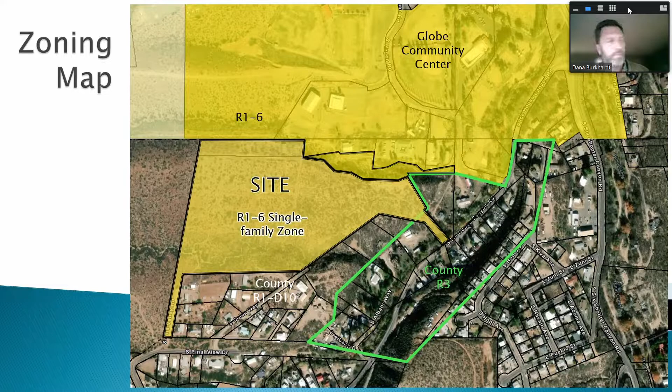Or the applicant has the opportunity to dedicate that land to the county to become a public right of way, or something like that. So there's options, but this is the process that we go through to make sure we button up every corner of the property and have all entitlements in place. Here is the overall.

Excuse me, Dana. Mike Pastor has a question. Then the back entrance that right now isn't platted, is that a developed road or is that?

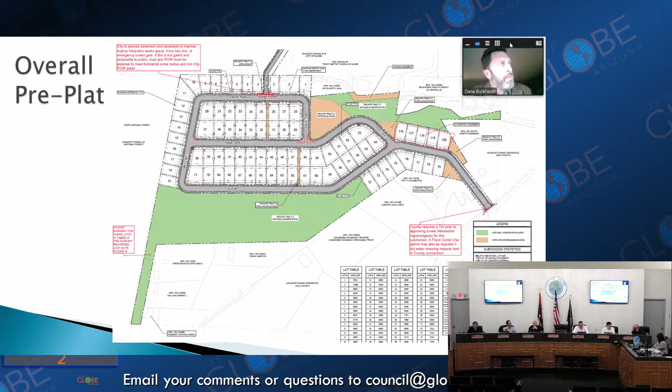The back entrance. So you're speaking of this area that we're about to look on the map adjacent to, off of Pinal View Drive, that isn't... Oh, no, I can't find any record of anything.

You know, through this review process, I request any documentation. So for instance, if there is an existing access easement out there that's been recorded with the county, then they just need to reference that documentation on the final plat.

Okay, so we can tie it all together. That's the whole goal for the plat, keeping one document with all these entitlements and one place to go if you need to learn information about this property, and how it might affect other properties through its entitlements.

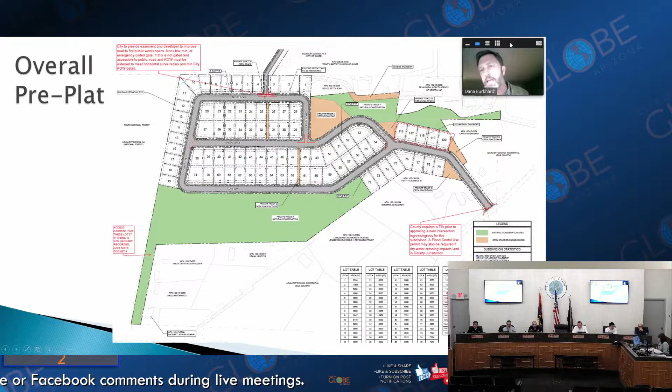Yes, so just a couple of minor points, I'll quickly take you through the plat. It's a total of 84 lots being proposed. I think the concept plan that you saw during your rezoning was 85 lots.

Here's the secondary access point coming from city property on the north. And I believe the water line is intended to also be constructed to provide primary access for water through that corridor.

And then the secondary access way, this is actually proposed for emergency access. So what we'll do is likely make it just a tract of land for emergency vehicle access and a public utility easement for the utilities that might be within that area. Over here would be that primary access location off at Icehouse Canyon Road.

The areas in green are called out as natural conservation area, basically open space, both very large washes. The brown color areas - we have an access easement granted up here to allow continued access for the properties, I believe it's the church at that location. And then the other open space areas are for the local amenities for the community, active open spaces, entry features and so forth.

As I mentioned, there's significant topography changes here and a wash through this location, so it's just a nice large buffer to the properties to the south.

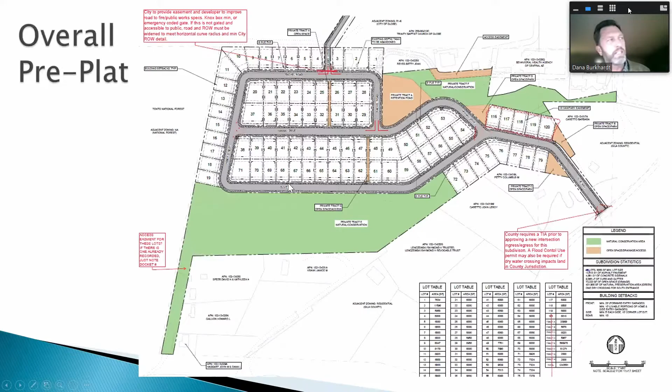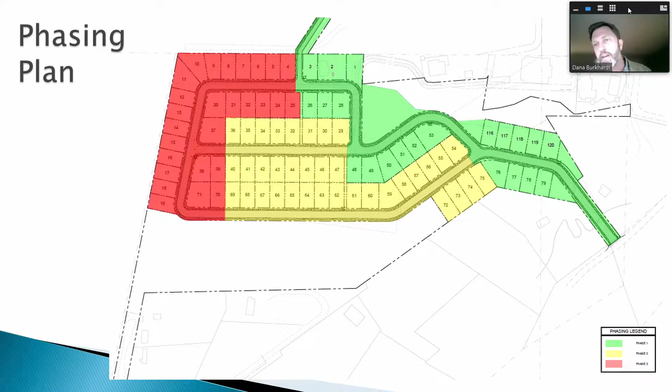If it does develop that way, the city's subdivision code has a provision to allow for some temporary turnarounds until the subdivision's finished, so we ensure that if an emergency vehicle or a car goes down there, they're able to turn around and get out and have that legal access to do that.

This is a blow up of the grading plan, and I just identified a couple areas. Lot 1 would have almost a 20-foot retaining wall at this corner. You can see the topography there as it slopes into the wash.

At this location you can see these contours again — those are the hillside, basically the ridge line coming into the property. At that location in red, it's about a 23-foot tall retaining wall, and on the opposite corner of that lot, a 20-foot high retaining wall, and so on.

So right through here is a really large cut. Down here on lot 70, between lots 38 and 70, there's a significant grade difference of about 28 feet. At that location it would be almost a 28-foot retaining wall, then 25, 20, continuing to reduce in height as we get closer to flatter land, and it starts to daylight.

One of the conditions of approval — just to let you know, preliminary plats would traditionally have a number of conditions just to make sure we're capturing anything outstanding that we still need to address in the final plat and through the improvement plan process. So I have about 12 conditions of approval listed.

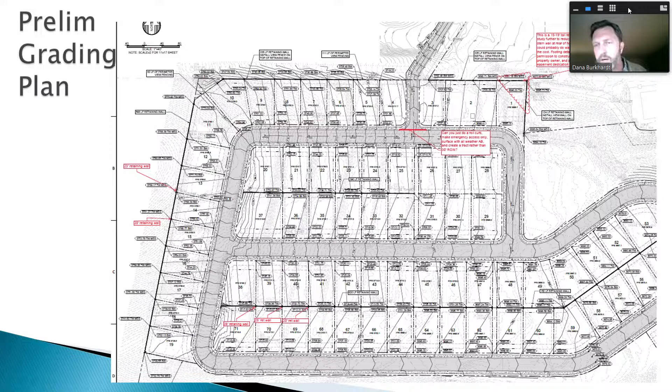Moving on, the issue of Ice House Canyon Road — you can kind of see here, this is a county assessor map. The county has not updated their boundary yet for the city. But as you know, where you see that dashed blue line, that's the municipality — City of Globe to the north, Gila County to the south. It'll also extend around and capture all of Adria, the applicant's land, which was annexed 2 years ago.

So if you take a look at the right-of-way here, through this section, you see that gap between these two lot lines. We have lots on the south side, lot on the north side, and then a right-of-way in between. And that's how we like to do our roadways. Put them in rights-of-way, and it's city asset at that point, or in this situation, county asset. Same principle, be it city or county.

Well, when we get right just north of our project entrance, the right-of-way disappears. And effectively, these lots have that roadway, Ice House Canyon right-of-way, on their property. And that continues all the way down to the southern portion here. So, that's not uncommon in our area.

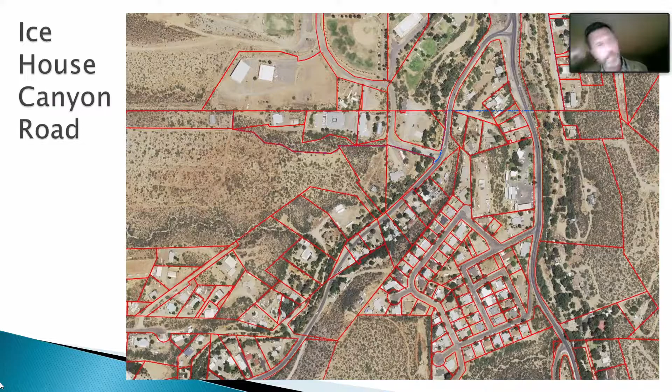All right, so if you recall, public outreach was through the rezoning process. Now, subdivisions are a little different. They're more strictly an administrative process. If it meets our laws, it's a formality, if you will, for council's approval.

So you usually need a good reason to deny. We don't have any issues, obviously, staff hasn't presented any issues, and Planning and Zoning Commission hasn't found any significant issues to question or be concerned about. We find that this application complies with your subdivision code and zoning ordinance, and that's what we want. That's why we have those codes in place.

So there is that continued traffic concern on Ice House Canyon Road. We did, based on our conversation with council at the rezoning, notify all the property owners within 300 feet of the property, the same property owners that were notified at the rezoning, that this would be coming forward. And again, we identify stipulation number 8 in your recommendation to approve, which is the proposed intersection with Ice House Canyon Road is Gila County jurisdiction and requires their approval and permitting. Address Gila County review comments to the county's satisfaction prior to receiving final plat approval and recordation.

The Planning and Zoning Commission again considered this last week. We had 3 members of the public, one of which being Misty. I think she supports the idea of the project, but traffic is a big concern as well. It was expressed as a concern from 2 other neighbors. But nobody actually expressed opposition to the plat.

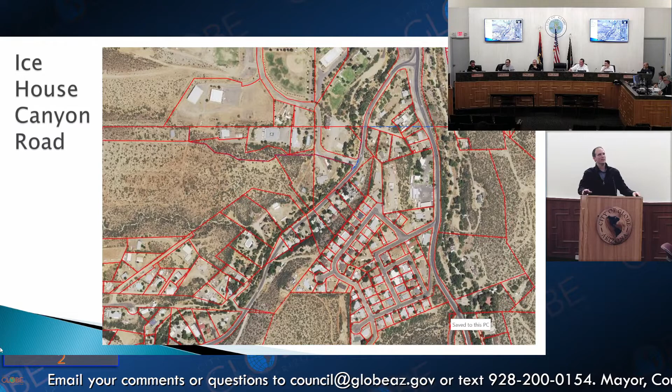And Dana, Talmadge is at the microphone. He may have some responses to Mr. Vice Mayor. Hey, council, I'm the person that went to college to make those plans. Thank you, we've worked hard on them. So yeah, I can answer actually a lot of those design questions.

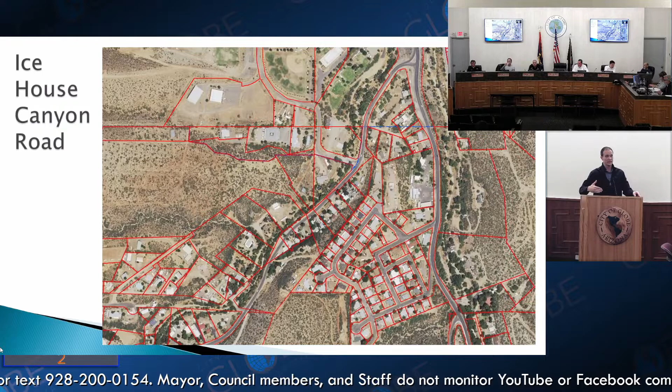So we've been with Adria since the beginning and put together the whole subdivision. So that question, the plan was always to have secondary access, whether it's just for fire, like Dana said, there's still details to work out. This is preliminary plat, but we do got to get a lot of the details done at this point because you're trying to put together this whole thing. So yeah, that's always been the secondary access, never meant to be primary. It's like 2,000 feet of road through community center, very narrow roads to get there. It was always meant to be just fire access, backup plan for the main entrance.

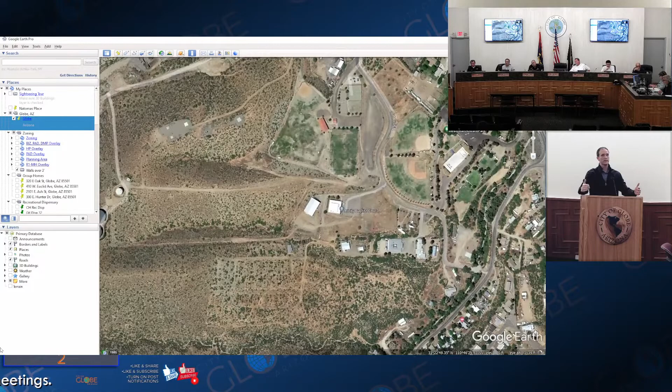But it could be developed into a usable road. We're talking about the one coming on the north. We're gonna build a very usable road, that's in our plans. Beyond that, the community center road is real narrow. That would be up to the city to want to develop and widen it, and just consider the ramifications of routing a lot of traffic through a place that's meant to be walkable and more people oriented.

I have one other question, Mr. Vice Mayor. Go ahead, man. Originally, when the proposal was made, I think we were at the Board of Supervisors room. Wasn't there an apartment component to this development, or is this all homes? Go ahead and come up so everybody can hear you. Condos or apartments?

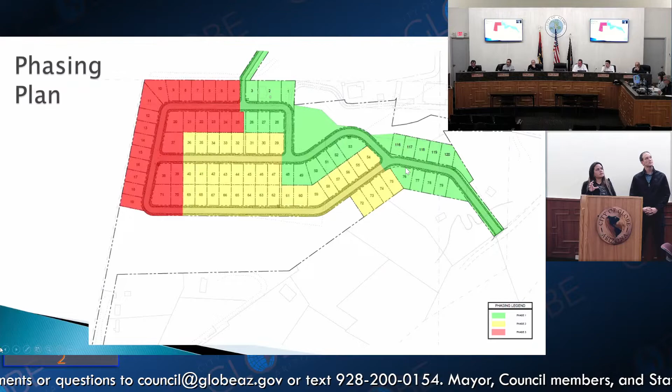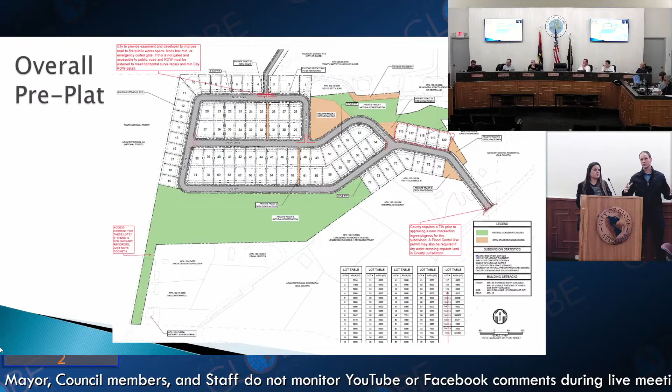Originally, we thought that at the base of the subdivision where Ice House Canyon meets that entrance, we could put a higher density occupancy in that area. But we changed that because of the steps that were gonna be required, the variances and things that were outside of the normal R1-6 zoning. We'd have to create our own zoning basically, and it just takes a lot more work, whereas R1-6 doesn't have to do that.

Right, okay, so it's all houses? Yeah, but it was always residential. It was just a different product. Okay, no problem.

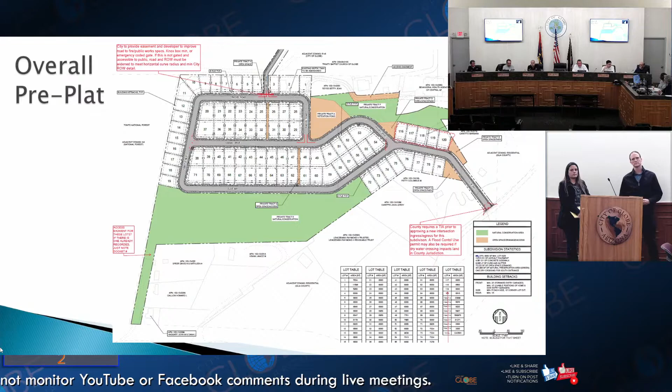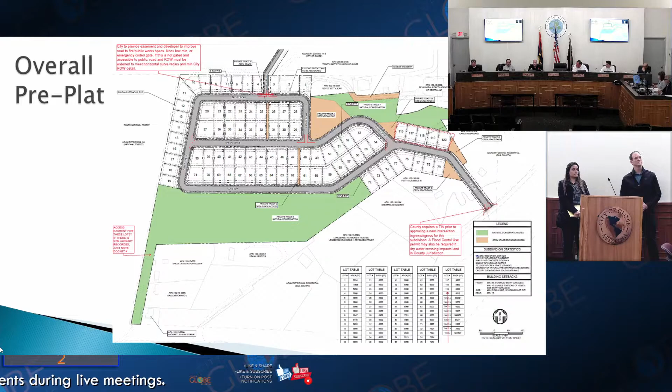Any other questions or comments? I do like the idea of Dewey Street though, and I feel like if we could do something to help facilitate that, that'd be worth having. Because even if a third of those residents went the other direction, it would help.

Mr. Vice Mayor, members of council, I think that is phase one, to get that connected and kind of see where the gravity takes us, where the natural flow is. But we also want to be concerned about having more population in that area, more pedestrian and kid population. So I think we will look at it as it grows and see what comes of it, but I don't think this is the time to make that decision, and see where the need falls.

Fair enough. I will add on the traffic concern - I think the concern is more about speed than volume. Those roads, in bigger cities, would be considered arterial roads meant to move traffic, whereas up behind the community center would be very small local roads. So I think it's more about street design, designing it so that traffic slows down, rather than saying don't bring any more traffic there, because it's bad as it is with the traffic that's there. And that's for speeding, not because of the count of cars, in my opinion.

Any other comments? If there are none, is this a motion or an action item? I don't see a motion, so I'm gonna create one. No, there's a motion on that - an amended stipulation. Okay, I'm not seeing it. It's right here on this first page. Oh, you have the hard copies. Oh okay, I see it, I'm sorry. Recommended motion? Maybe you should read that. Go ahead, Fred, let's give it a shot. So if there's no other comments or questions,